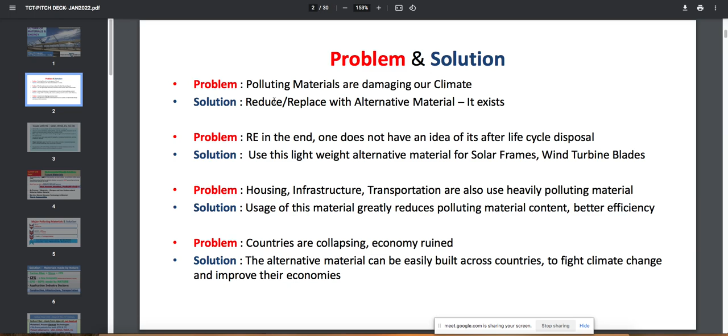So if every country in this world adopts this particular type of building material in their houses, we can collectively improve our climate and collectively build our housing. I will show you this.

So these are the things I told you: renewable energy, solar, wind. Now there is a huge amount of solar panels and wind blades being discarded, and we don't know what to do with it. This product is also useful for that.

So the question is, what if we're able to replace steel, concrete, aluminum, fossils, oil and coal? I'm not saying entirely replace, because that would be a straightforward catastrophe, disruptive for the entire economy. But over a period of time, if we adopt this technology using nature itself, we can do this.

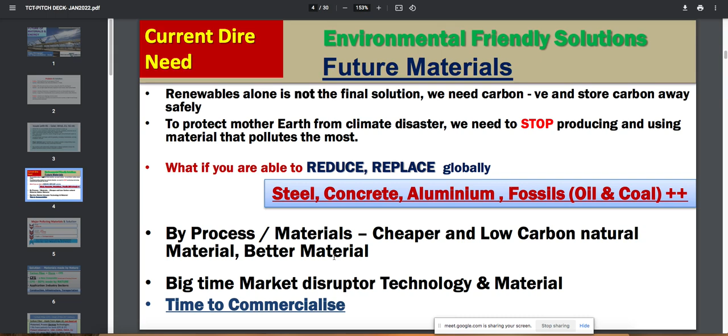And this product has already been developed. Now we need to go commercial.

So the solution we have is called carbon fiber stone, which is the material of the 21st century. I will show you applications implemented across sectors, what all you can do. Moreover, this makes the material, as I told you, from stone. This is the composite.

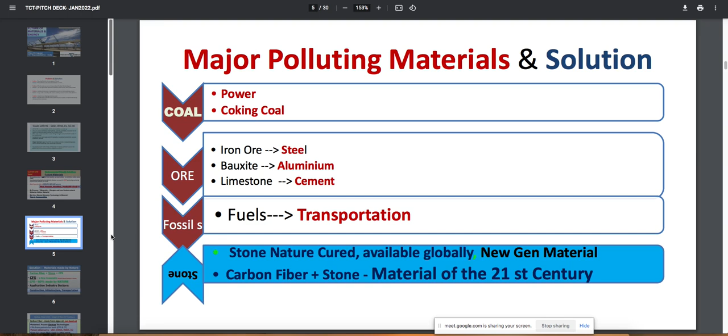As I told you, it's a new composite. It is already being done in Germany, France, and some parts of Italy, but only on a small scale basis. Application industry sectors are construction, infrastructure, transportation, aviation—many sectors are applicable.

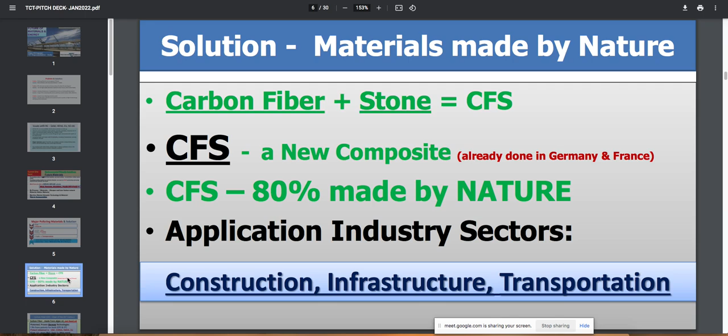We have been making this carbon fiber using fossil fuel, which is a very polluting and expensive material. But we now have the patent to make the same fiber using algae oil. We have already obtained patents in the US, China, India, and the European Union, and there has been a spend of about 5 million euros, some given by the university as a grant, some by us as the promoters. We have established the product—sales of this product have been going on in Germany for the last few years, to the tune of 200,000 euros per year.

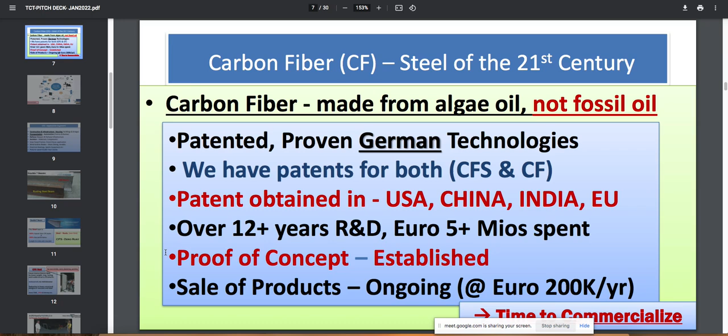This is the process, if you want I can explain: this is the algae, and from here you process it down to make oil. From oil you make thread. From thread you carbonize it, and then, like any of our shirts, we can weave it and use it. And when we combine it with stone, it becomes carbon fiber stone.

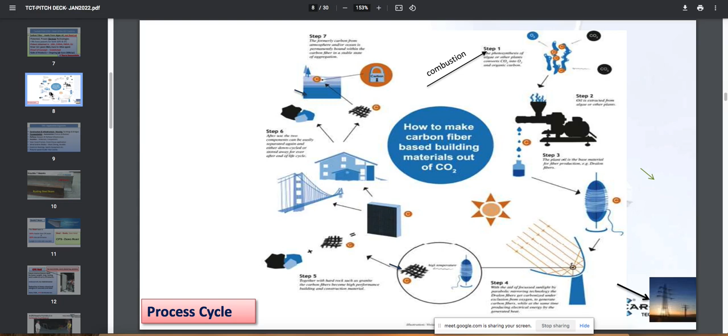So if you can see these application segments: construction, infrastructure, buildings and bridges—we can do that with the stone. Transportation, automotive frames will become much lighter and much more fuel efficient compared to bodies built with steel. Trains—the dirty toilets we have inside trains—can be made with carbon fiber stone, easy to clean, lighter, and long lasting.

We can also make railway sleepers, because they have been tested to European standard at more than 3 times the safe working load. Aviation, I already told you. Solar panel frames can be made with it, which will not rust, and greenhouse applications. Wind turbine blades made with it are also stronger—I'll explain more in the next slide.

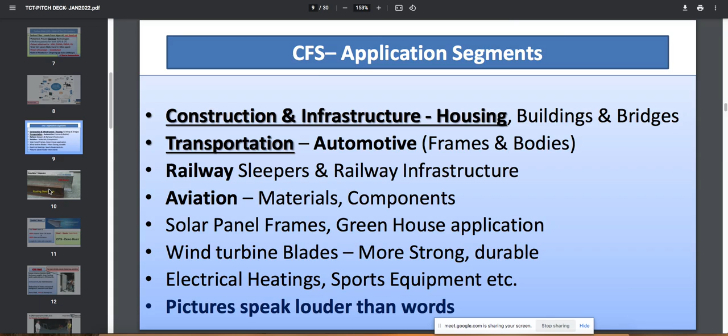So, better than me speaking, let the picture speak. We see here a rusting steel beam, which over time will rust. But we have a double T beam made of granite stone, which is 50% less weight than the current steel beam and 50% more stronger and more durable than steel.

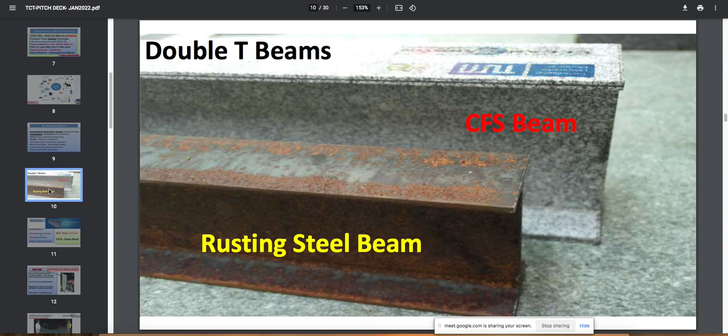As I told you, it is 50% less performance, and it is a 6.4 meters length with one joint in between.

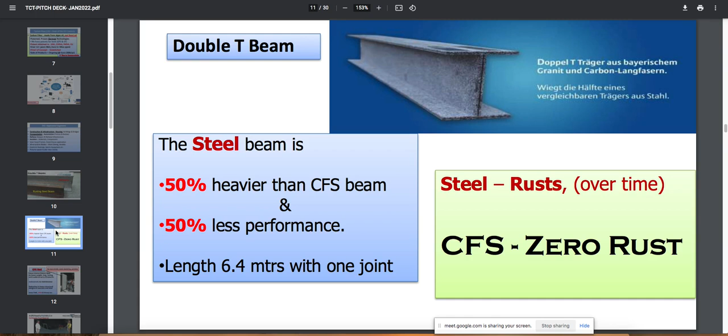So when we make a CFS wall about 1 meter in width and about 3 meters in depth, cut into the granite, you can see we don't need in future any brick, sand, plaster, painting. Granite, cheaper granite can do it, and can carry a weight of three floors.

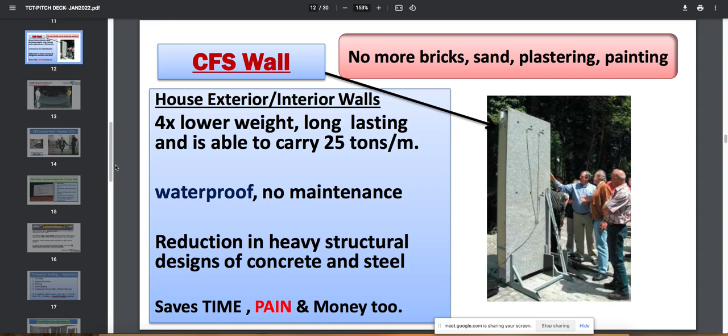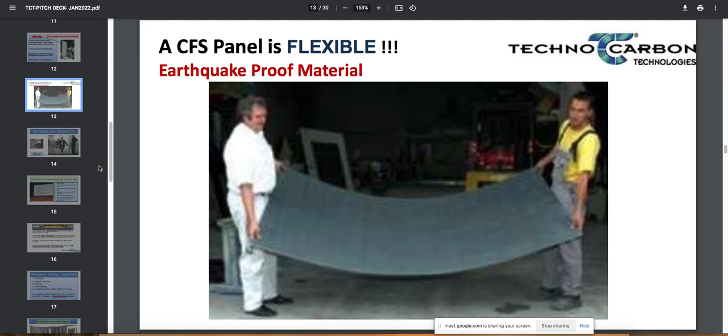Even it is flexible, so it means it's an earthquake-proof material. This is the real photo that is there, which is a frame of a wall.

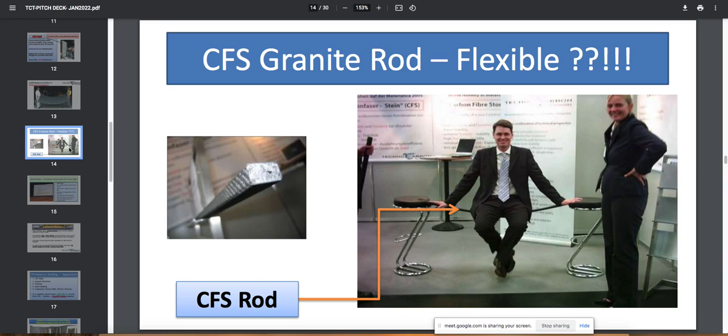This is again a CFS granite rod. It is flexible. So stone has become made flexible using carbon fiber.

As I told you about wind blades, we have won an award in December 2021, where it replaces 60% of the steel in the wind blade, and it makes it more lighter, so the efficiency of the wind blade also goes up. And it is long lasting, and even after it breaks down, it can be used in other areas of infrastructure.

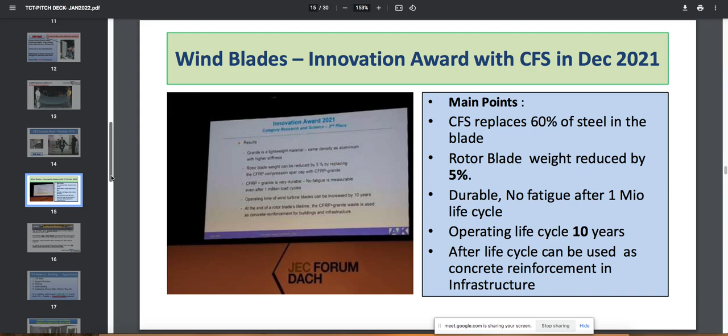As I told you, the railway sleepers, they are 2 times longer lasting than concrete sleepers. Currently it is costly, but when we make it on a commercial scale, it becomes cheaper, and that too in Europe, where the labor cost and everything is pretty high, and they don't have the granite, they have to import it. It already meets Deutsche Bahn standards, and the trials are on in Germany.

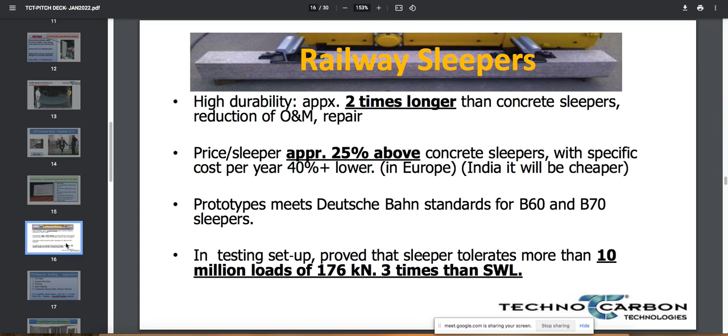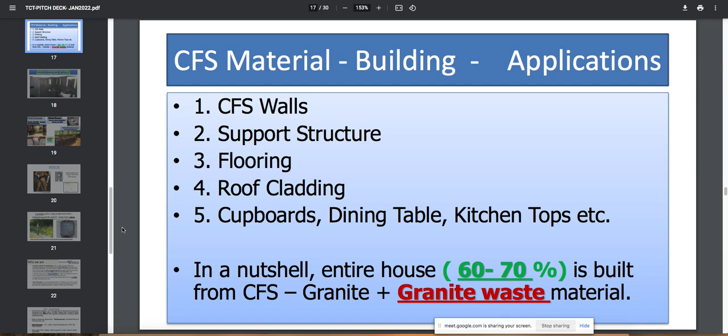So when we go to a building, if you say the walls are made of carbon fiber stone, the support structure is there, the flooring, the roof cladding, cupboards, dining table, kitchen tops, etc. Entire 60 to 70% is built with granite, carbon fiber stone, and even the remaining granite waste material too. So we are making use of the granite waste also.

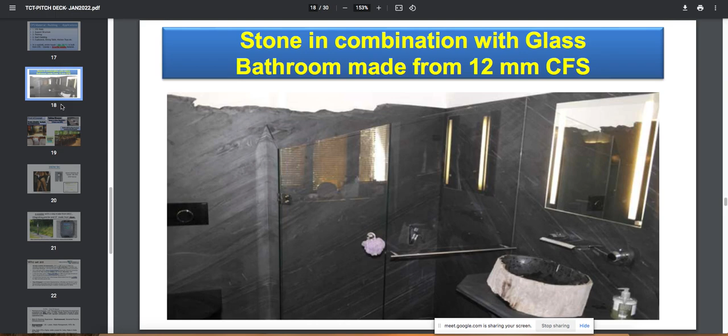So this is a bathroom where we have also combined with the glass. This is a bathroom as an example made with carbon fiber stone.

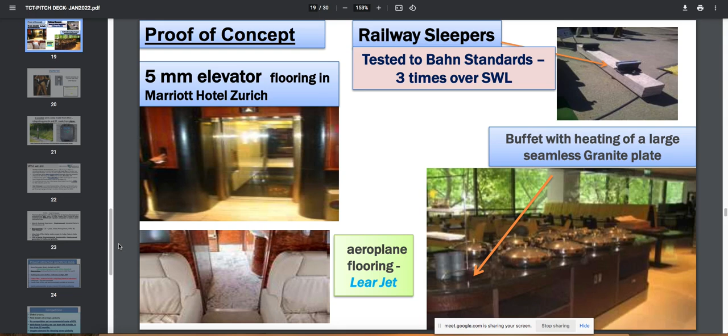It is being used in Marriott and Zurich for the elevator flooring, and this is the dining table which is made of this.

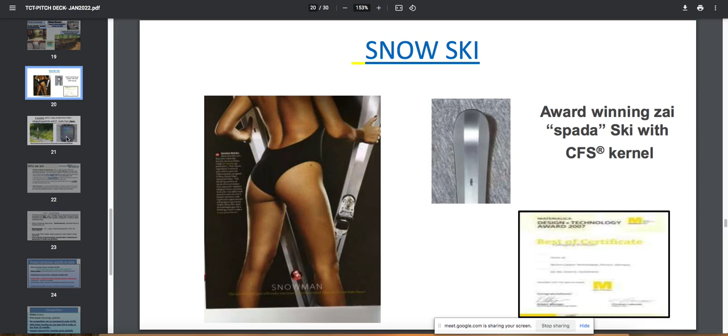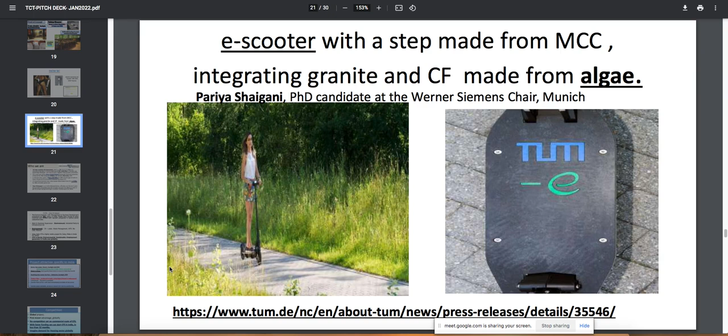This is an example of a carbon fiber stone made from algae oil. They have made the pad here. The lady is using it in one of the universities. It is already made in there. The TUM is the Technical University of Munich. So there are a lot of partners in this research.

So we are Europe, as I told you, Techno Carbon Technologies from Germany. It's a very, very small company having its R&D and all that in Munich, and they've been developing it over a period of 12 years, with a lot of patents. They're also working with another company called Green Carbon Project, where even Mercedes-Benz and Airbus are involved, working together. They are doing their part using the metal, we are doing our part using stone.

Okay, and they have been given a grant also. I have been representing them over the last 10 years, following it up, giving market feedback, and so many other issues. And we intend to do what we intend to do.

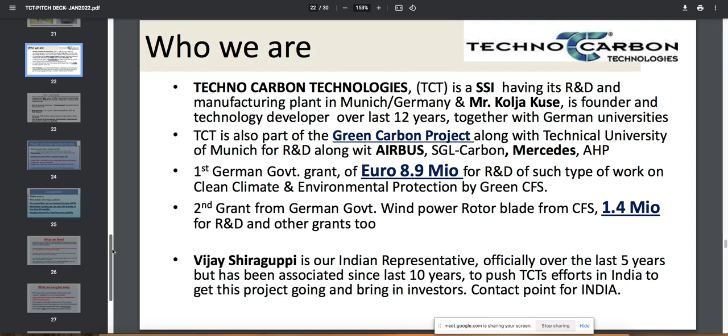As I told you, I've already told about me. So I'm an engineer with 30 years experience, 20 years in environmental.

Why is this project very specifically attractive to India? Because we have sun, stone, and seawater. Seawater because we make algae in the sea, and we have desert where we get enough solar light. Carbon dioxide, of course, is everywhere in the world. So these are almost free resources - sunlight, carbon dioxide, salt water is free.

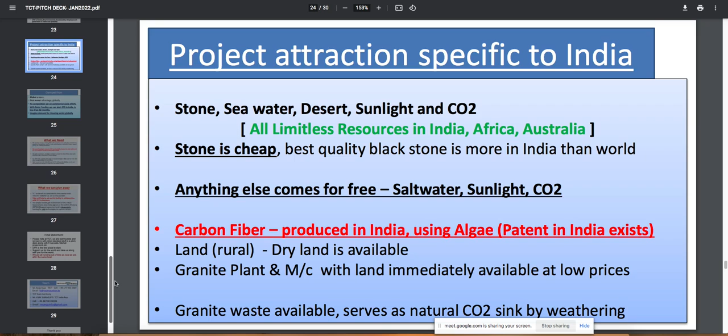You can use that to your advantage in making this production commercially viable. Rural land is available, stone is available. There are many granite plants that have gone bankrupt because of government policy and environment issues. They are now going for very cheap price, so you can build a project on this with a very low spend.

This is a global project. As I said, tomorrow Africa, as we are talking about circular economy - Africa as a circular country can build it for its own building network. Australia can do it too, but some countries like Europe can't because it's very expensive and they don't have much sun.

It is being made commercially in Germany and being sold, and it would be the first if we make it in India. You can just imagine the demand in every sector I've shown you, particularly the housing sector, which contributes almost 40% of global emissions.

What we need - we are poor people, simple as that. We have spent money earlier, and we need to conduct a detailed project. I'm looking for funding, but beyond funding, I'm looking for a strategic co-founder and investor who could understand and visualize the potential of this over time and make it a global project.

If you start with a simple detailed project report - we have done some small work on that, but it is expensive and a single person can't do it. So I'm looking for a team of people, industrialists, investors who can form a team, mentor me, and the German company will come and give the technology. We will work together; we have to make this the first start before I can make any pitch.

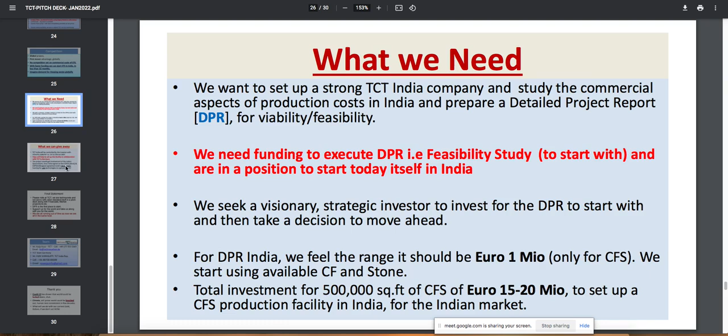My ask is basically to have a detailed project report with me. As I said, I don't just want an investor, I want a strategic investor, any industrialist who can come and do this, because many of them are investing now in green energy, sodium, lithium batteries, and all that - environmentally focused companies can look at this and work with us.

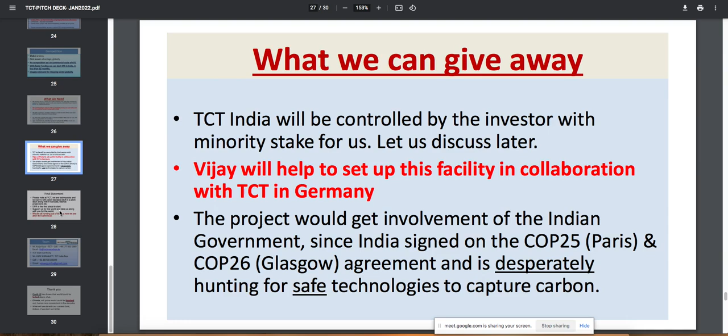What we will give - we will give them majority. We don't want to be owners of this. We can have a little bit of stake. The partner who invests will own the maximum shareholding, and he will run the business. We handhold him till a certain stage to make it working, and then we go.

As I told you, we are technocrats and not savvy with the standard stuff in a pitch deck from the financial market. We need to work with it, and the project report is the first place to start.